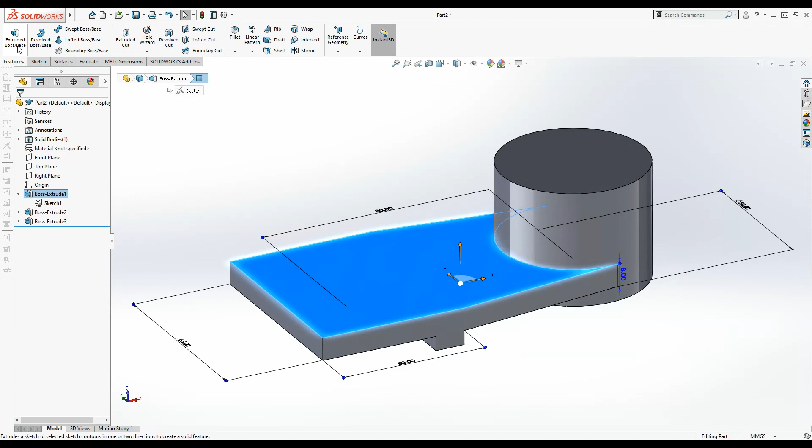Alright, so with the top surface selected, following on from the last video, I'm just going to go into Extruded Boss Base, press the space bar and choose Normal To.

Now to create the outline for the shape we need, I'm just going to find this center point snap here, click and produce a circle. The dimension, the diameter for this is 36, and the center distance from the point of origin is 40 millimeters.

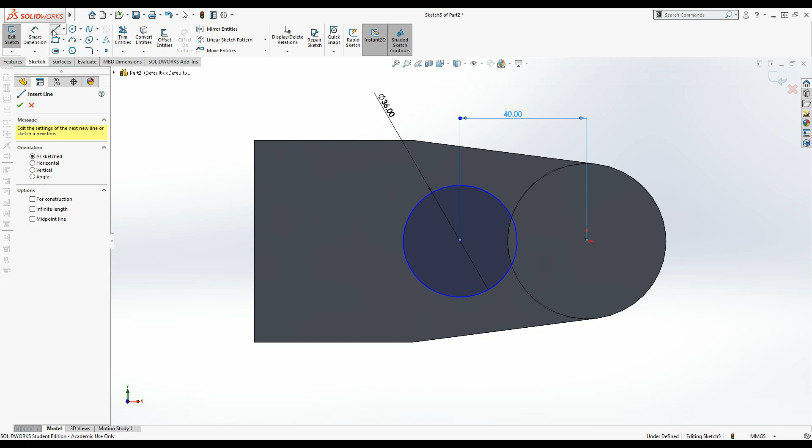We now just need to finish this shape off, overlap it slightly as we've done before with the 3 lines into the main model. Now we don't need to worry about this too much because where you've got solid overlapping solid, the software kind of just absorbs it, so we don't really see that issue.

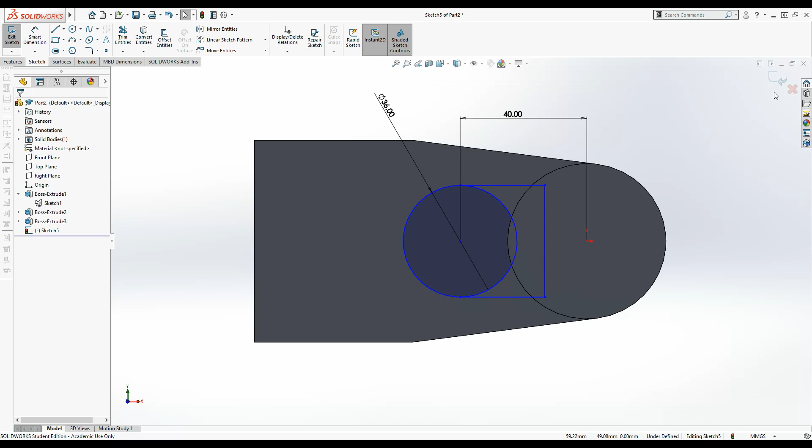Okay, so exit the sketch. And because we've got a few sections here, we need to use selected contours just to select them. We need to make sure we've got 5, just to doubly make sure we can select this bit as well, and have a roll around and see what we've got.

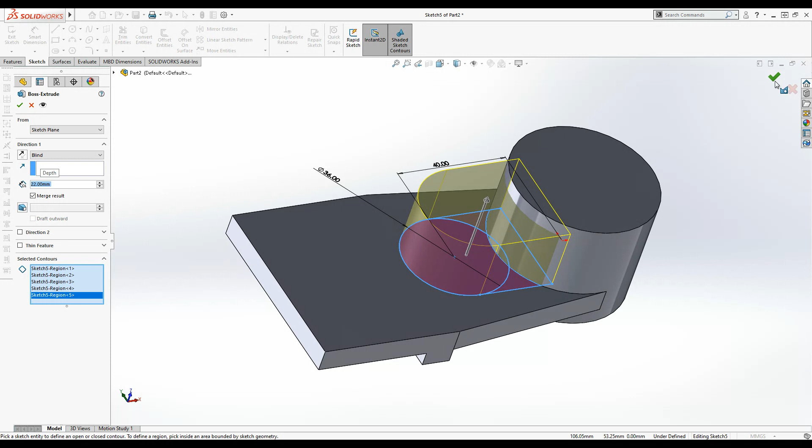The height for this is 22, and green tick to complete. Okay, so that's that bit finished.

Now we've got a rib and a few holes to worry about, so let's get the rib in place first. Again, we snap to the point of origin to begin, so we should have one of our planes sat down the center. There we are, the top plane.

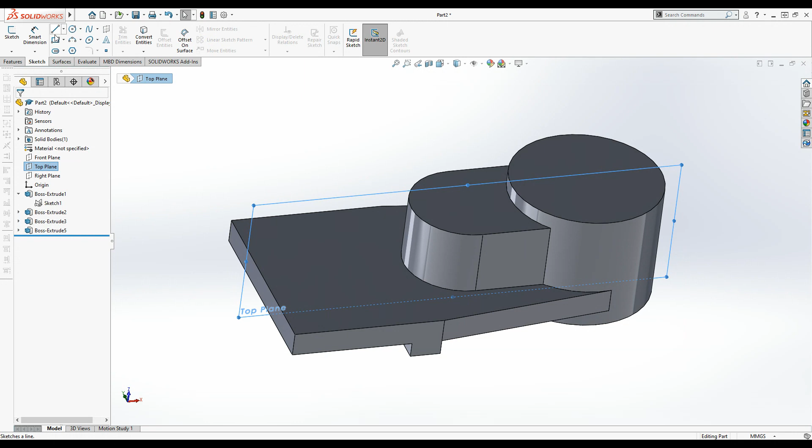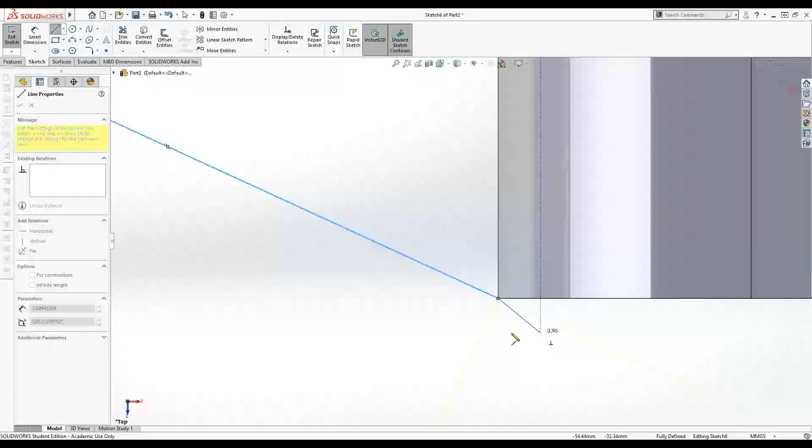Straight into the sketch tab, get the line tool, press the space bar and choose top or Normal To. I'm going to snap to this corner here, and then snap to the top edge of this shape here. You should be able to get a little point appear. And then because it's cylindrical, I'm just going to move slightly across the top as well.

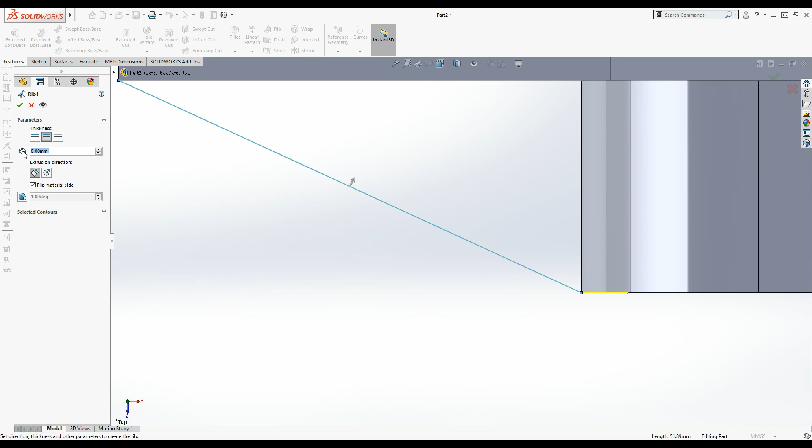So 2 lines. Exit the sketch, into the Features tab and choose Rib. Click on any one of the lines. Make sure the arrow that appears is facing the model by clicking on it. The width of the rib is 8 mm, so just change your width over here and make sure it's set to the middle option. Green tick.

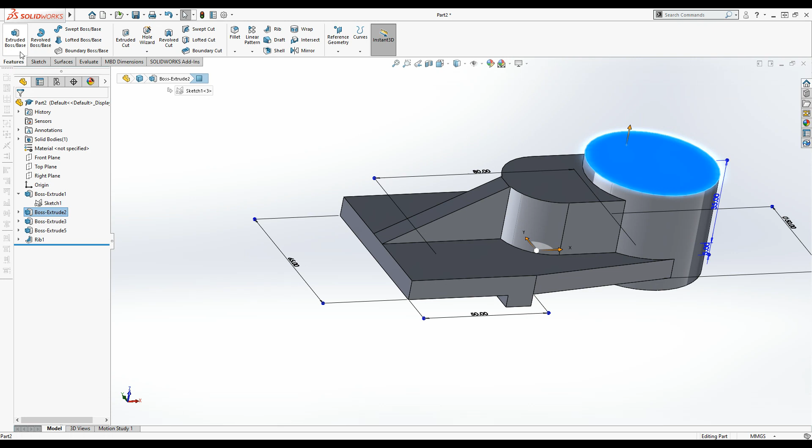Okay, now the cylinder at the top is actually stepped. We have a 40 mm diameter hole, goes down 7 mm, and a 35 diameter hole which goes all the way through. So I'm just going to choose the top surface, click on Extruded Cut, get the circle tool, snap to the point of origin, smart dimension the circle.

40 millimeters, and we can actually get away with drawing both circles here. So 35 for the internal, and exit sketch.

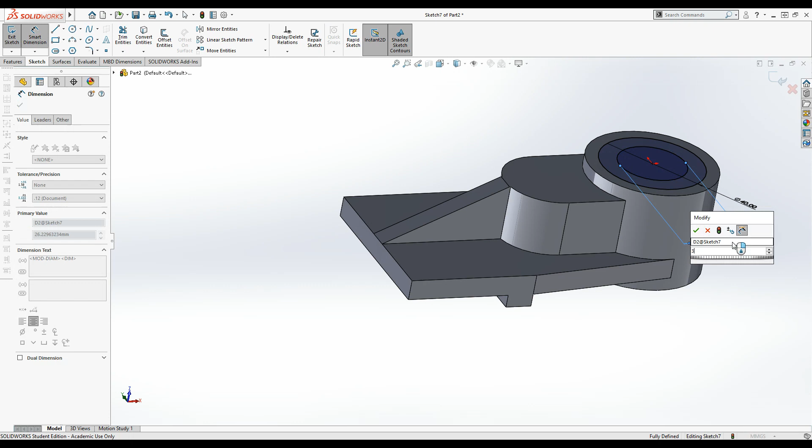Okay, click into selected contours, clear selections by right clicking, choose the larger of the 2 circles we just drew and change the dimension to 7. Green tick.

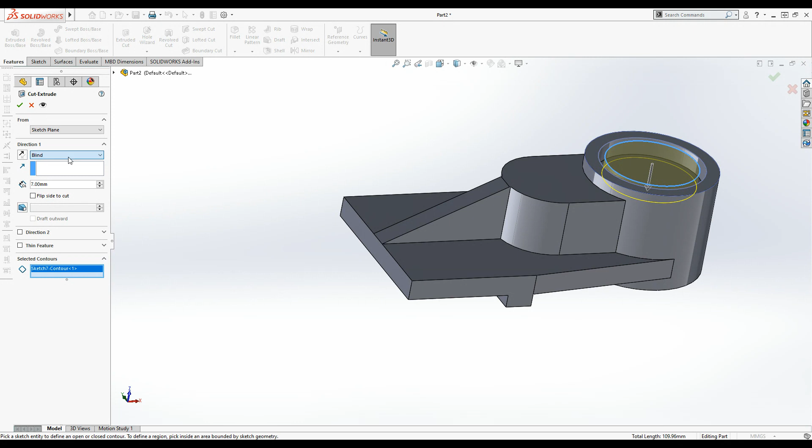Okay, now we need to select that sketch again so we can use it again. So I'm going to expand my last feature, click on the sketch, back into Extruded Cut. Selected contours, right click, clear selections, and choose the internal circle this time. Now this one can be set to through all, and green tick.

Okay. Now there's a couple of bosses and holes need adding to these surfaces down here, so I'm going to choose the top surface again, click on Extrude, spacebar and normal to.

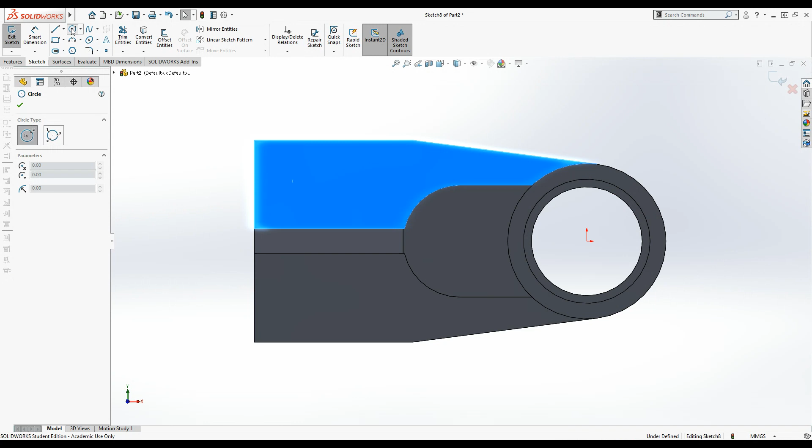Right, so to begin with, I'm just going to position 2 circles with the same center point randomly, and then I'm going to worry about getting the dimensions sorted out.

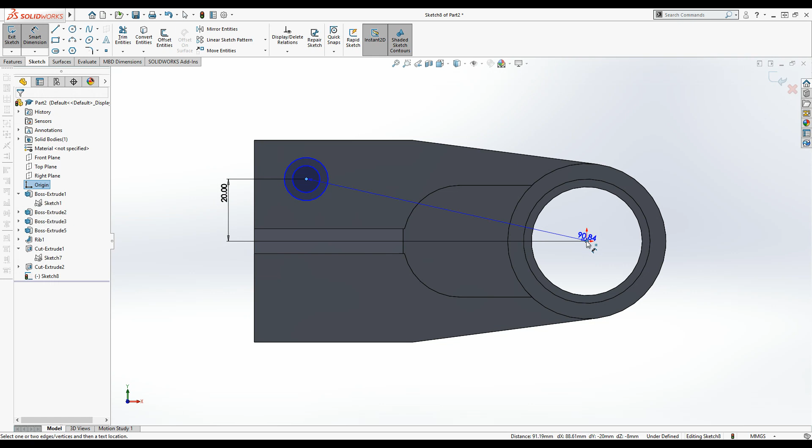Alright, so from the point of origin to the center we have a 20 mm distance, and then again, but this time applying the dimension horizontally, we have an 80 mm distance.